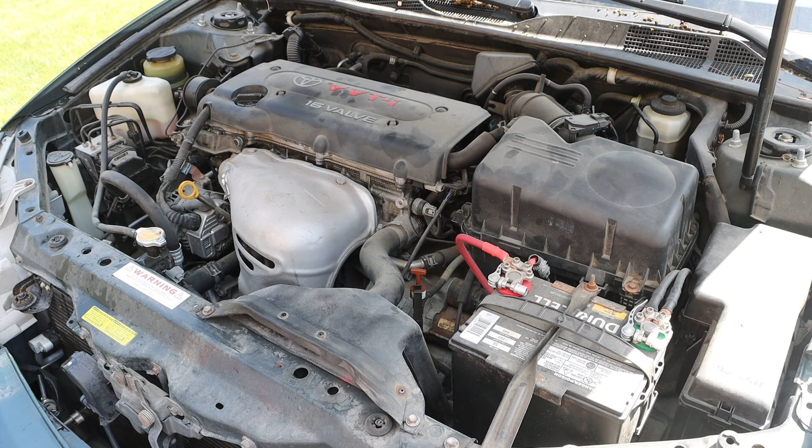In this video, we will be fixing the rattle at startup issue in this 2003 Toyota Camry. At startup, we have a quick rattle, which quits after about 1 second.

This process will be completed in a garage, and the vehicle has been parked so that the passenger side front is accessible. We have jacked it up and supported the vehicle with safety stands. We have set the parking brake. We have wheel chocks underneath the rear tires, and we have also drained the oil.

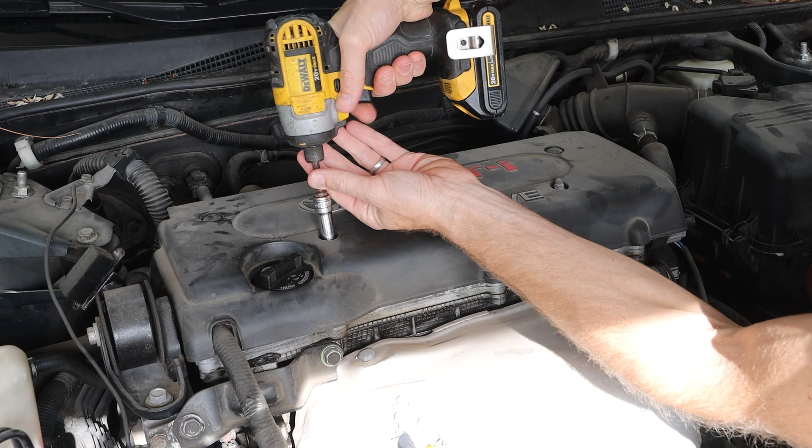And we can begin by disconnecting the negative battery terminal, covering that and setting that out of the way. We can then remove our plastic trim cover piece. This is held on by two 10mm fasteners. And we can pull that up and work it off of the two studs holding it in place.

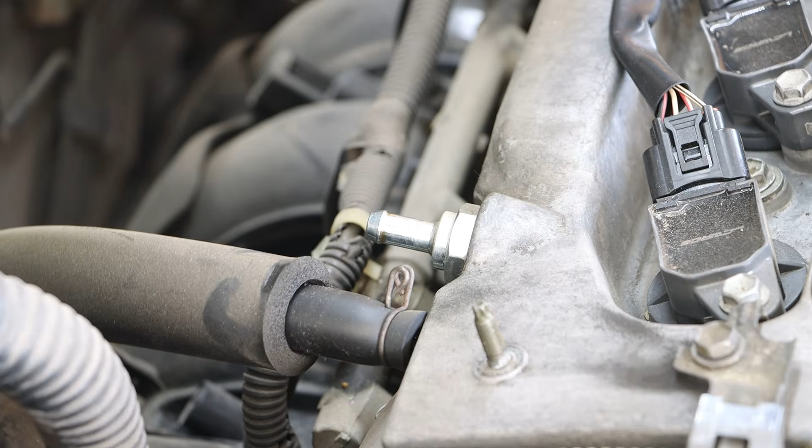We then have two air lines that we need to remove from the valve cover. These are part of the positive crankcase ventilation system, or the PCV system. These are held on by two spring clamps. We can then take a look at our bundle of wires running over the valve cover, and I'm going to be working from the valve cover forwards, removing each connection point. So starting with the top of the valve cover, I do have a 10mm fastener.

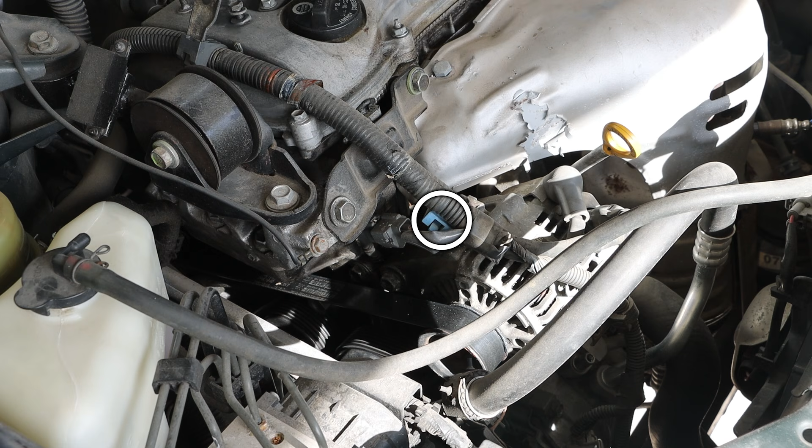Following that down, I have a blue connector and a gray wiring harness just above the alternator. Pressing the tab on the bottom, we can remove that first connector and also that blue retaining connector. And we have 2 points on the alternator, one of which is a 10mm nut. Following it down further again, we have a retaining clip mounted to our AC compressor.

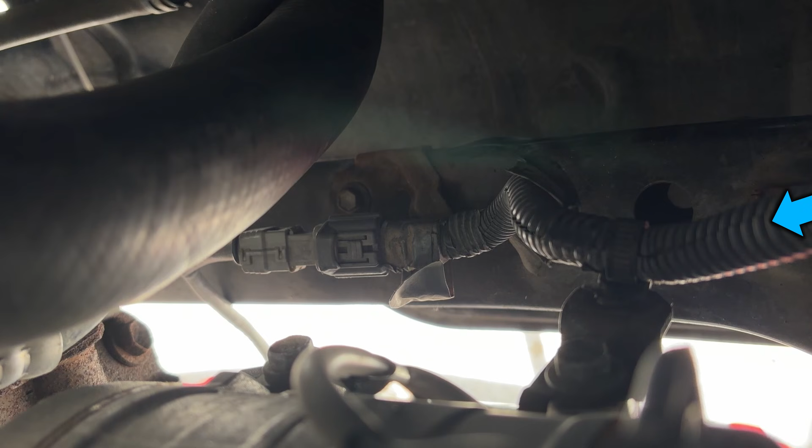We have another wiring harness. If we continue following that wiring loom down into the engine, we can see that we have an additional connection. This is just a small plastic clip. That chunk of wires then gets terminated at the end of the line with one more wiring harness. This one goes to your oxygen sensor located underneath the vehicle. And at that termination point of that entire wiring harness, we do have one 10mm bolt holding that bracket in place. And that should give us the ability to move that entire wiring loom out of the way.

We can then remove our ground wire. There are two 10mm fasteners holding this in. Our 4 ignition coils can come next. These are all held in by a wiring harness and one 10mm bolt. We now have better access to our valve cover.

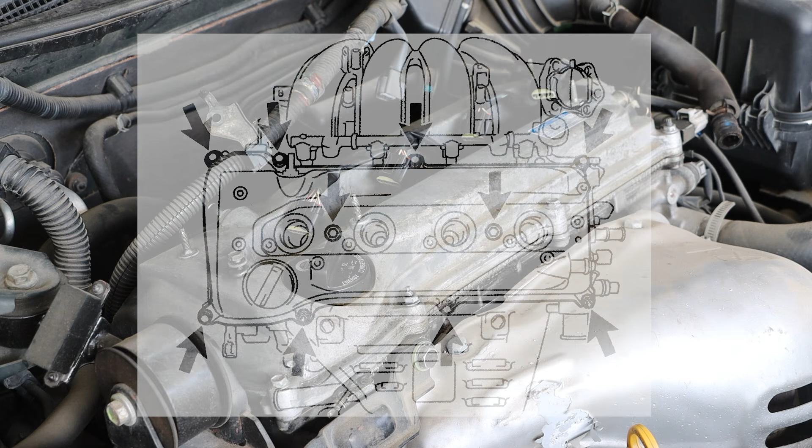Taking a look at the diagram, around the perimeter we have 8 fasteners and 2 in the center. Each of those fasteners are 10mm. Some of them are nuts and some of them are bolts. Plus an 11th one that was holding down our bundle of wires going to our ignition coils.

Our 2 longest bolts went in the middle. The 6 bolts that are the same size go around the perimeter, and also 2 nuts around the perimeter where we have studs coming through, and that one additional short one is what connected to the far end of the valve cover holding that wiring harness down. We should be able to very gently work that valve cover off.

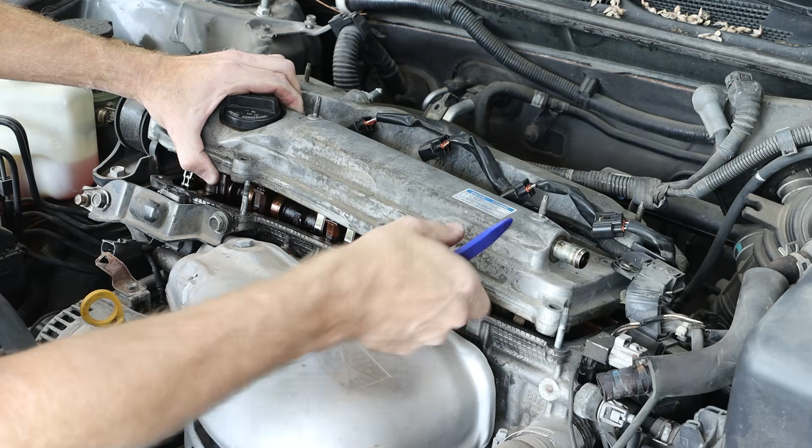And with that valve cover off, we can see our reason for the repair, which is the VVT sprocket, which is what causes the 1 second rattle at the startup. To prep for this next phase, we are going to remove the wheel. And taking a look into the wheel well, we do have a small plastic shroud that we need to remove. Visibly, we can see two 10mm fasteners.

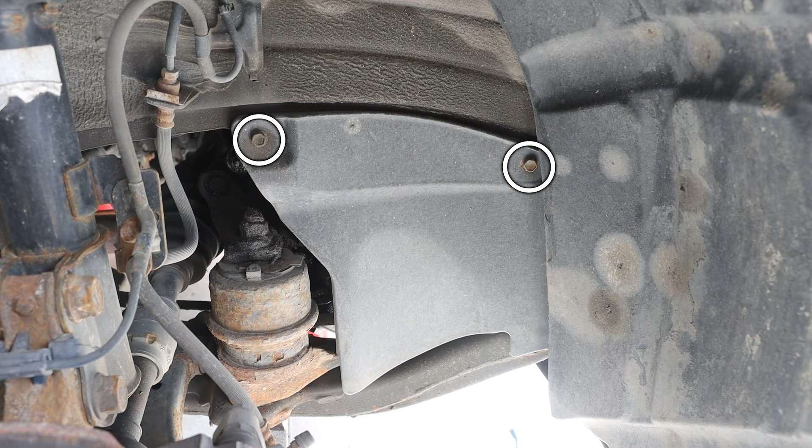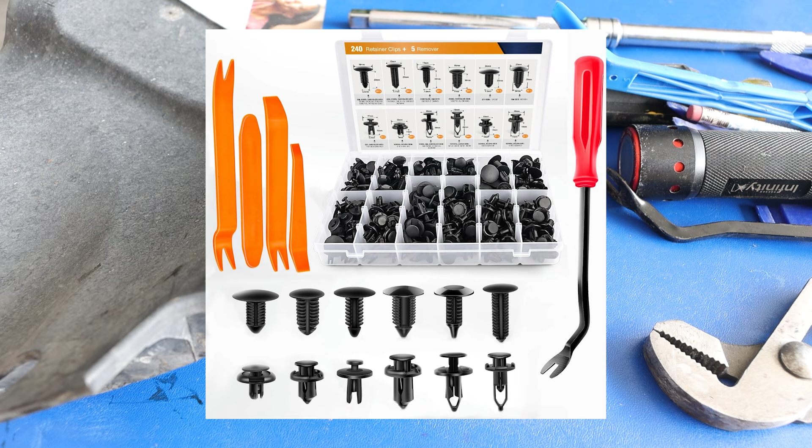And that one hidden fastener did have a button retainer where you pop out the center and pull the clip out. I couldn't see that, so I did end up breaking that little plastic cap, so we'll have to get another one of those. We can then remove the serpentine belt.

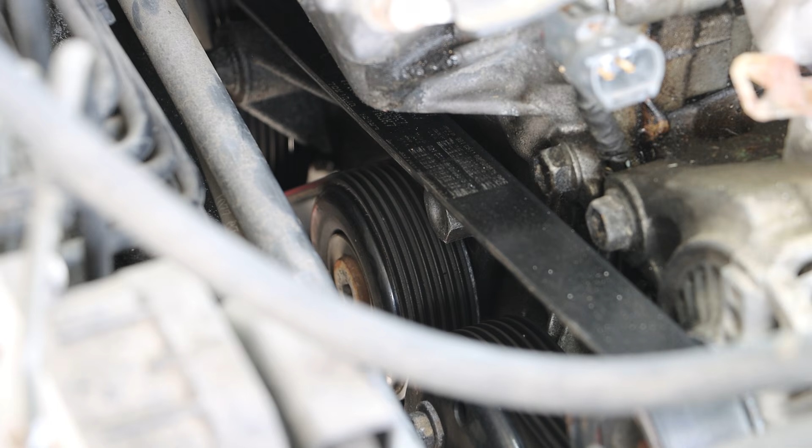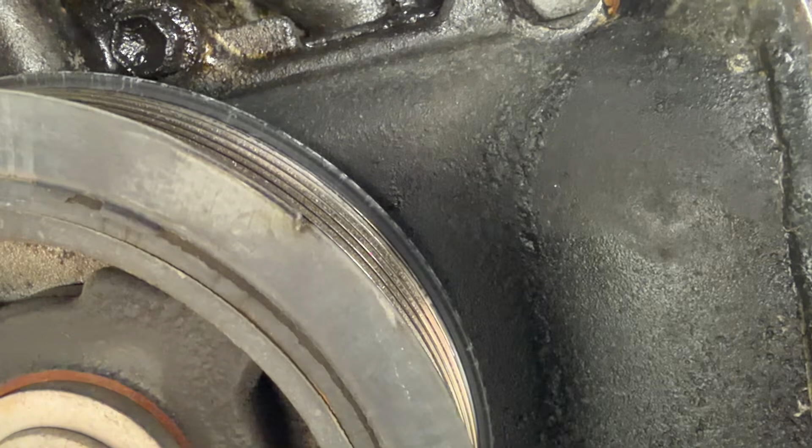If we look through the wheel well and find our crankshaft pulley, we can see that towards the top of it there is a small indicator. This helps us determine top dead center. If we look at the side of that crankshaft pulley, we can see a little notch. This notch needs to line up with our 0 indicator mark. So we are going to rotate that crankshaft pulley clockwise until that small notch lines up with the 0 indicator mark.

Now we do have a couple things to point out. We do have a timing mark on our VVT sprocket, and we also have a timing mark on our camshaft sprocket. If we look behind each of those, we should have a corresponding timing mark. And we can see that VVT sprocket and camshaft sprocket timing marks are lined up.

Now what I do not see is my identified chain link that helps me make sure everything is timed correctly. So I am going to rotate the crankshaft 1 full revolution, check this again. If I don't see those indicator marks, I'm going to go another full rotation and then check it again. And to verify again, I have my timing mark.

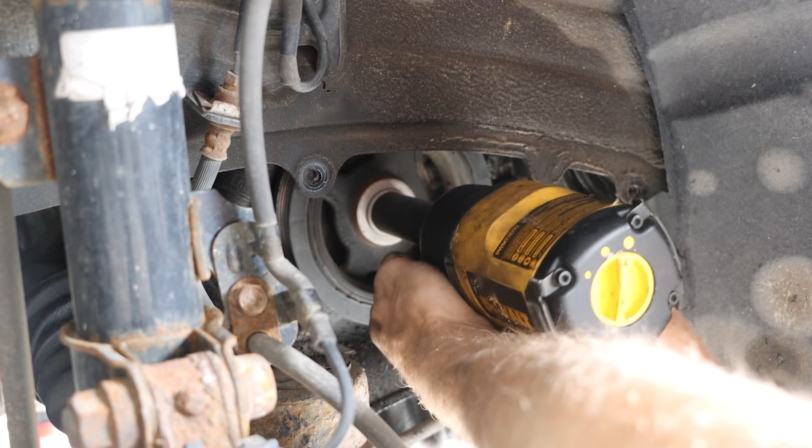That corresponds to my timing mark. I have my other timing mark. That corresponds to my other timing mark. And it is worth noting that our identified chain links are off by about 1 link on both of these. And at this point, we're going to remove that crankshaft pulley. And we can gently wiggle that pulley off.

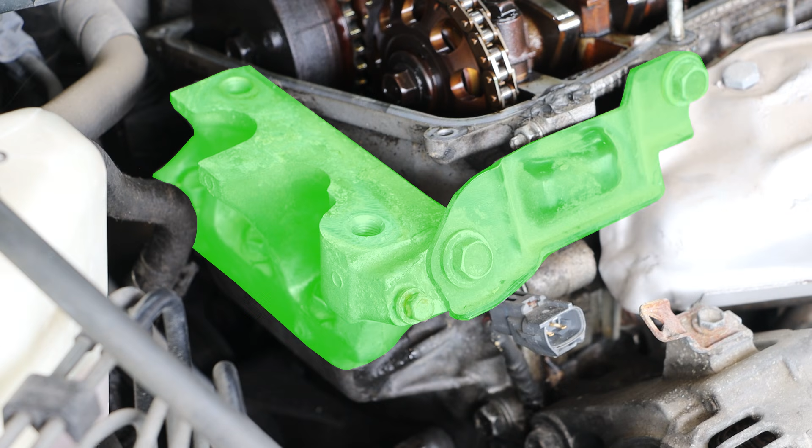Next component to remove is the torque rod located on top of the engine. This will have 3 14mm bolts. And we can remove that bracket that our torque rod unit was mounted to. There are 5 14mm bolts, one of which we do not need to remove.

If we take a look to the right side of the exhaust manifold down into the engine, we can see one 17mm bolt on our motor mount. And to aid in being able to move the engine up and down, I am going to remove the axle nut. This will give me just a little bit more flexibility. And this is a 30mm nut.

We then want to locate our motor mount on the passenger side. The top of that has a 19mm nut.

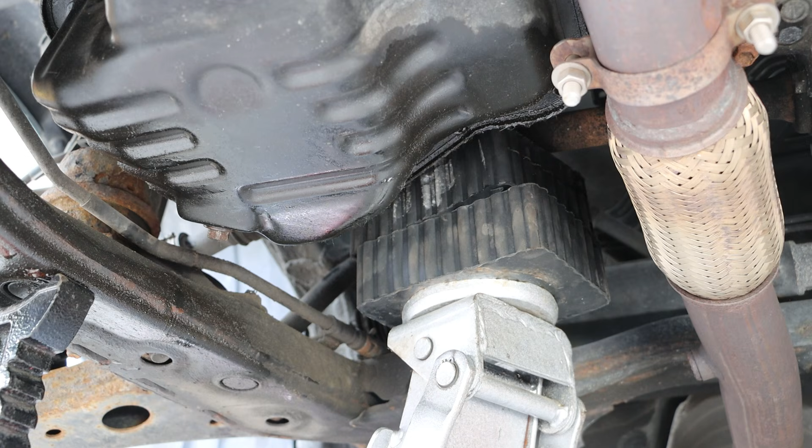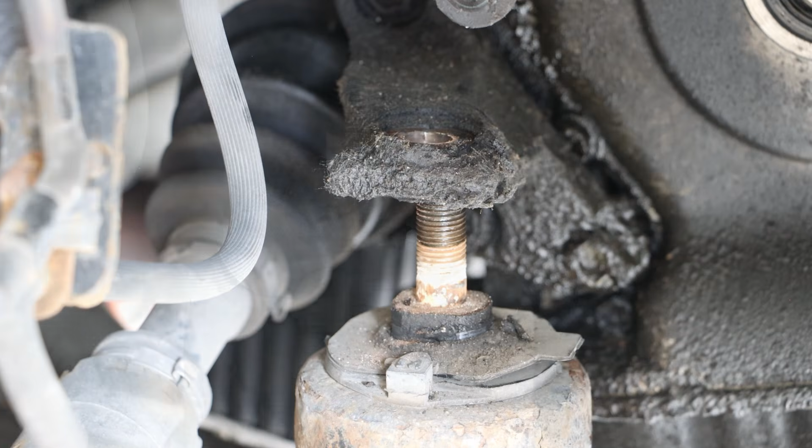To jack up the engine, I have placed a couple rubber blocks on top of my jack, and I have those positioned just behind the oil pan. This way we are not jacking it up directly on the oil pan. And we are actually jacking this up by the bracket that is mounted to the engine that our axle runs through. This does give me plenty of flexibility, and I'm not worried about crushing that oil pan.

And with that engine raised slightly, I'm going to switch my focus back to the top of the engine, and I'm going to locate my water pump pulley. And with 2 wrenches opposing themselves, I can loosen up my first bolt. So we got 3 of those loose, and we can loosen a couple of those up part way to get a screwdriver in there and use that screwdriver as leverage for the last one.

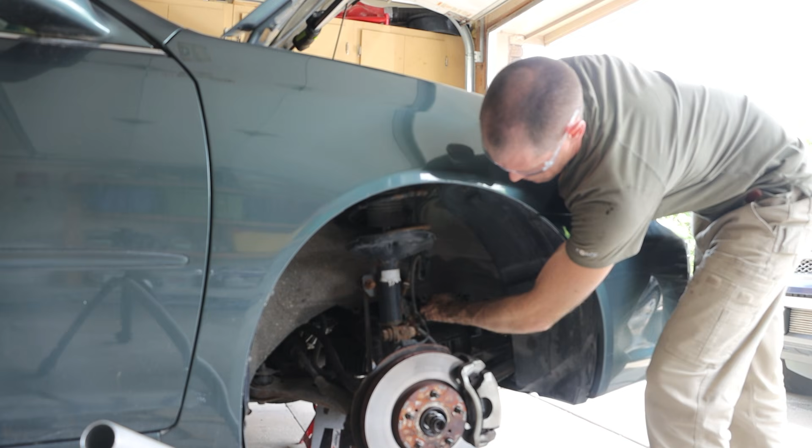And then we can shift focus to the tensioner itself. We have 1 bolt that is pretty clearly visible just to the left of that tensioner pulley, and that one is a 14mm bolt. And that tensioner is held on by 1 additional fastener. And then we can remove the bracket for our motor mount.

And we can then shift focus to the power steering pump. And behind that power steering pump, we can see 2 14mm bolts. We can rotate the pulley till one of our holes lines up with our bolt and work on a socket. And I am going to lower the engine down just slightly to get that last bolt out. And we should be able to work that power steering pump off. And this might require wiggling it back and forth to work that loose.

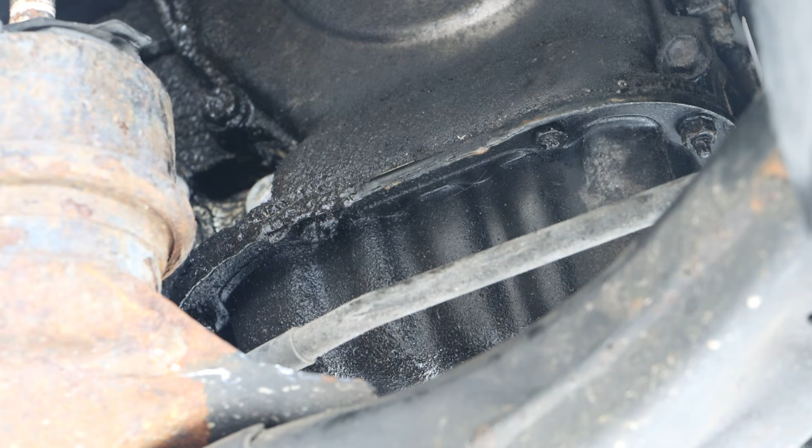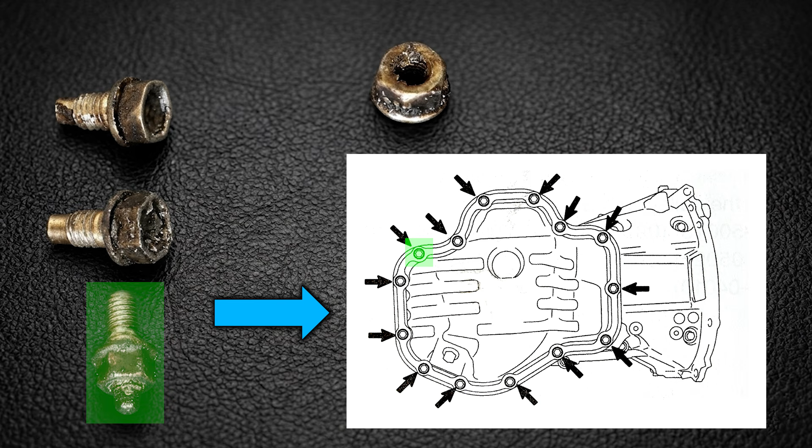Taking a look at our wheel well, we do want to locate the oil pan next. Specifically on the oil pan, we are taking a look at the front edge of it. And on that front edge, we have a series of 4 fasteners that we need to remove. These are 10mm fasteners. And if we take a look at those 4 fasteners, this is as if you were looking from the wheel well. We have a nut that is 10mm, 2 10mm bolts, and we have an additional 10mm bolt that has an inverted Torx head on the end of it.

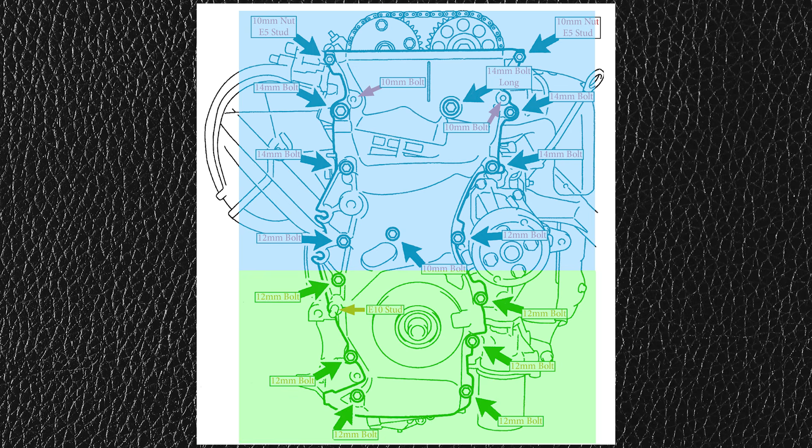And at this point, we are ready to remove the timing chain cover. We have a series of 14 bolts and 2 nuts around the outside of this timing chain cover. We should be able to access about 6 of them from underneath, and the rest we should be able to get from up above. And so we will just slowly work through, making sure to identify the location of each bolt, just in case the bolts are different sizes or lengths, etc.

And on the top right and left, we do have these inverted Torx. These are E5s. And to help things go just a little bit smoother, I did create a worksheet and taped it to a cardboard box, which allowed me to place each bolt in the correct location as I removed it.

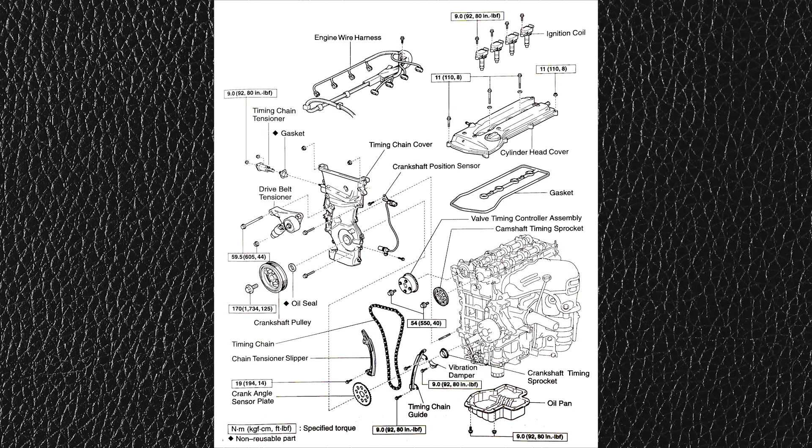On the back side of the timing chain cover, we have a timing chain tensioner, and on the front side, down towards the bottom of our timing chain cover, we have a crankshaft position sensor. We will take a look at this one first. And if we take a look at that, we can see one 10mm fastener holding that in place.

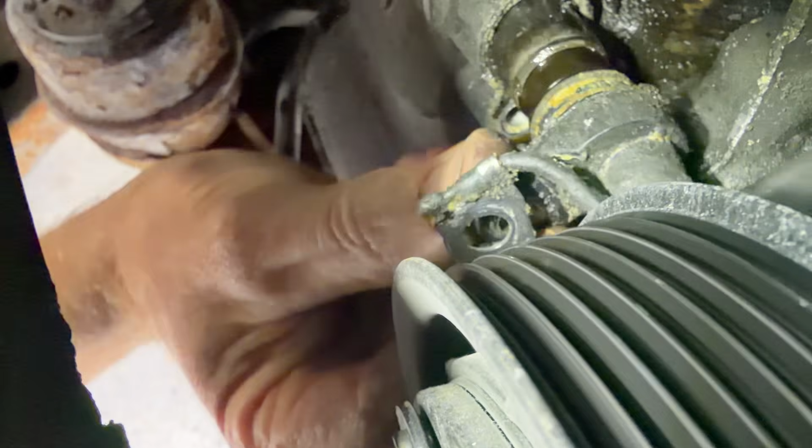At this point, we should be ready to remove our timing chain cover. I am going to give it a few light taps with a soft face hammer to hopefully loosen it up a little bit. And then I am going to gently pry from the bottom left corner to see if this will come off. Now it is worth noting that if you did not remove the E10 stud that goes through the oil pan, the pry method will not work because you're just pushing against that stud.

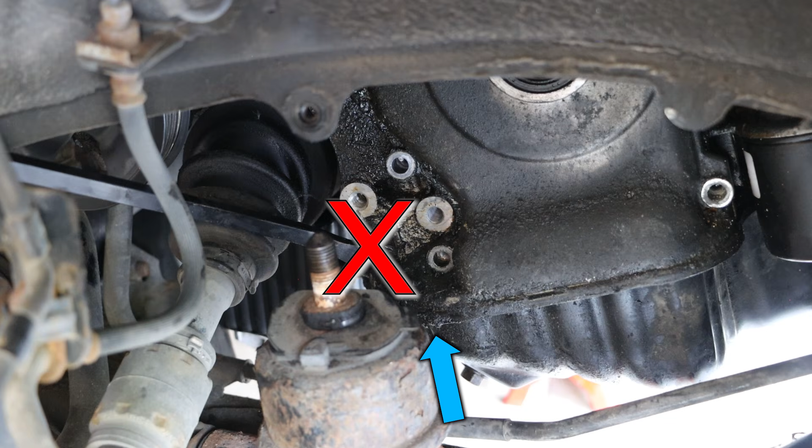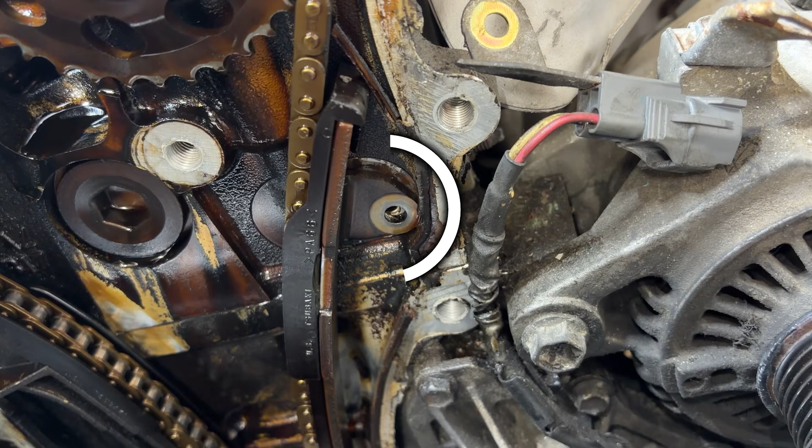Taking a look behind the chain cover, we can see our chain tensioner slipper on the left, and we can see our timing chain guide on the right. And on that slipper, we have one 12mm bolt at the bottom. And on that timing chain guide, we have one 10mm bolt at the bottom. And we are supposed to have one at the top also. This one was found loose inside of here. And we can remove those bolts and then work those components out of the engine and off of that timing chain.

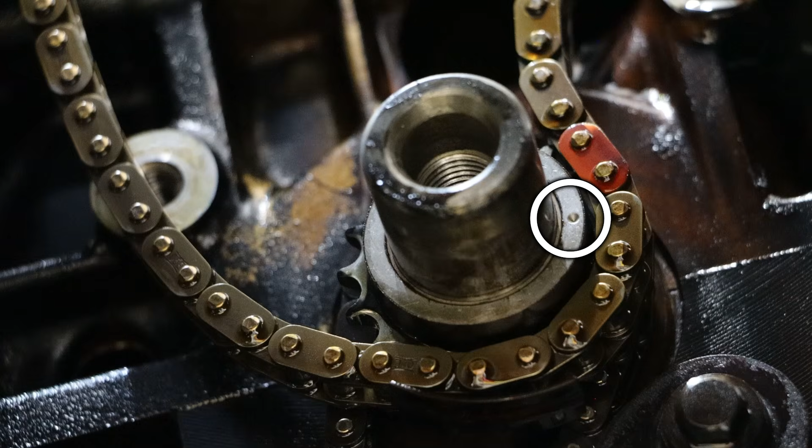Taking a look back towards the bottom, we have our crank angle sensor plate that we can work off. This is keyed and labeled with an F. And then we can see that timing mark on our crankshaft timing sprocket. Again, our indicated link is one link off, which corresponds to above with it being one link off. And we can go ahead and remove that timing chain. And we also have that crankshaft timing sprocket we can remove. And this one is keyed also.

We will then be removing our camshaft timing sprocket. We are first going to place an adjustable wrench on the camshaft. This will help hold it in place while we are loosening our bolt. And this then is a 14mm. And this is also keyed. That key is in line with the timing mark.

And that same procedure will be followed on the other side with our VVT sprocket or valve timing controller assembly. And that also has a key to help us set up our timing.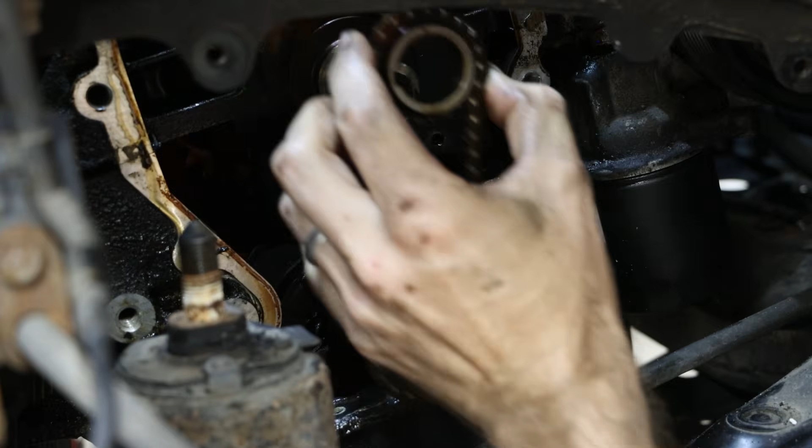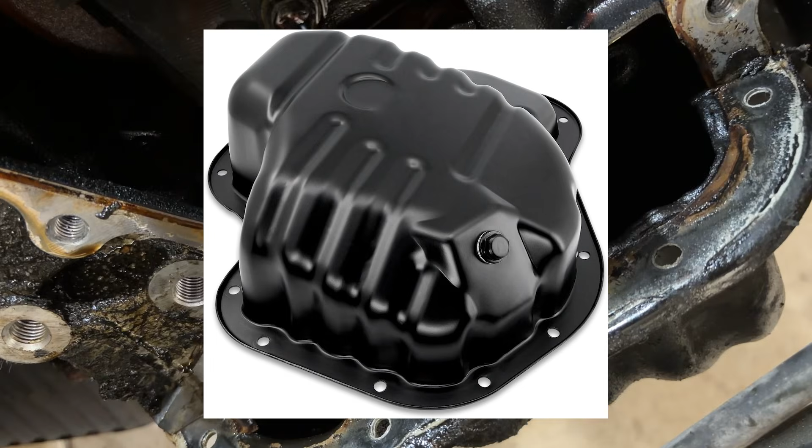At this point, we should have everything removed and we should be able to proceed with reassembly. One thing I did notice is that the water pump appears to have a piece of belt stuck in it. And given that we have plenty of access, we're going to go ahead and just replace the water pump as well. I also noticed that I had some debris fall into the bottom of the oil pan. So we're going to go ahead and remove the oil pan and replace this also. This will also give us an opportunity to inspect the pan and the components inside of the pan.

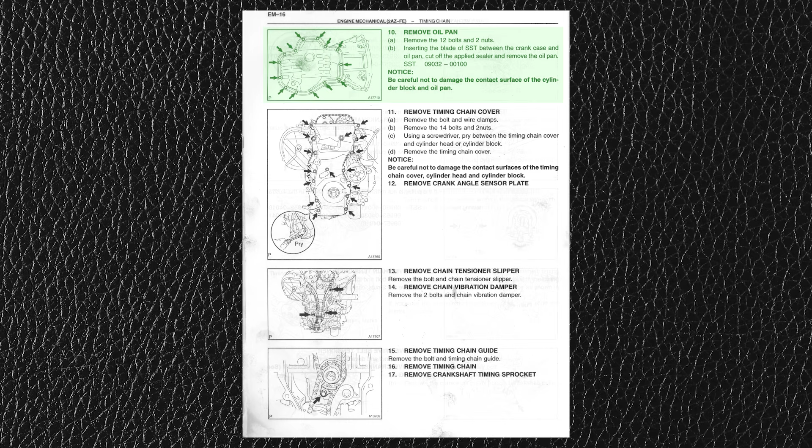Now in total, that oil pan does have a series of 14 fasteners, and in the Toyota instructions, they do want you to remove the entire pan for this procedure. Just something to keep in mind. And if we take a look underneath the vehicle at the oil pan, we do see a series of fasteners. All of these fasteners are easily accessible, which will make this repair just a little bit easier.

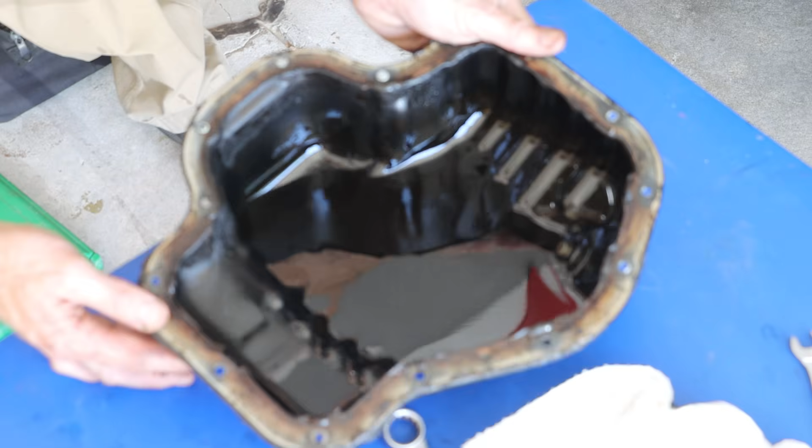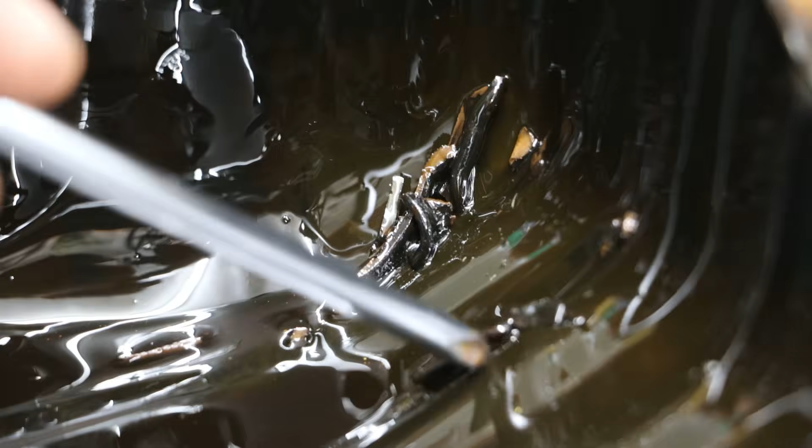And even though I did drain all of the oil out of this before starting this repair, you can see how much oil has accumulated from dripping off of the engine, as well as oil that just does not get evacuated from the system. So we're basically looking at about a half a quart of oil left in the system. And as I was doing this, I did notice some debris in the bottom of the pan. It is possible this is just old gasket material that has got crusty and broke off when I pulled the pan. And we do have some metallic specks in the bottom as well.

To remove the water pump, we first need to gain access to it as it is sitting behind the alternator. We have one 14 millimeter fastener that is pretty easily accessible.

And then we have a 12 millimeter fastener that is a little bit harder to get to underneath. And we should be able to pivot that out.

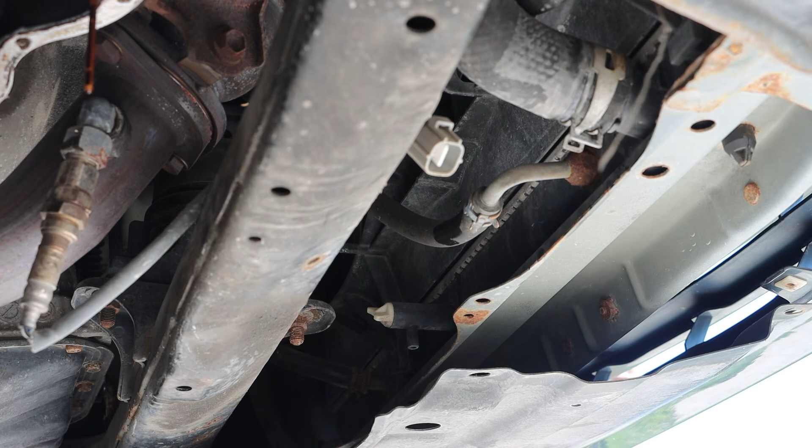Our system currently has coolant in it. We need to drain that down far enough that we're not going to make a mess when we pull off the water pump. This begins with removing our shroud under the front of the car. Taking a look up underneath, we can see our petcock. This will allow us to drain down our cooling system.

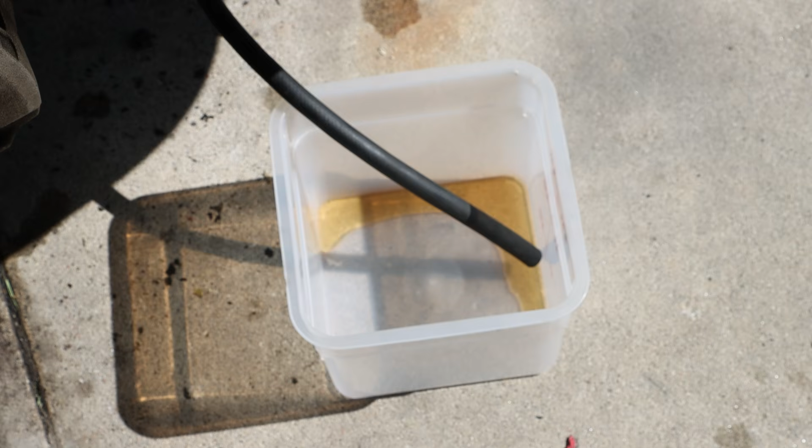For a more controlled evacuation, we can hook up a length of tubing and open that valve into our collection bucket. And since this is a sealed system, removing the radiator cap will introduce air that will allow it to flow easier.

On the water pump, we have a series of 6 fasteners around the perimeter of the pump. These are 10 millimeter fasteners. And we can remove that wiring harness as well. And we'll see if we can loosen that up with a soft face hammer. And you will want to have a drip pan underneath to catch any residual fluid.

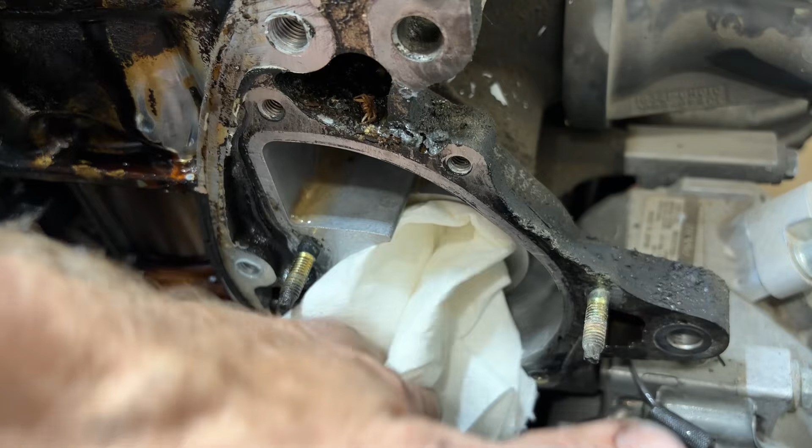And we can stick a rag in there while we prep this for our new one. And we can then use a plastic scraper to clean off the old gasket material and any buildup. And while I'm at it, I will just continue right around to the mating surface for my timing chain cover. And with the bulk of the material scraped off, we can come back with some acetone and clean this up really nice.

And while we are replacing parts, we might as well replace the thermostat. So we want to locate the thermostat housing, which is right next to where our water pump was. And we do have two 10mm fasteners, one on top and one on bottom. And to gain better access to the one on the bottom, I am going to remove my radiator hose. And using some pliers, we can work that thermostat out if it is stuck.

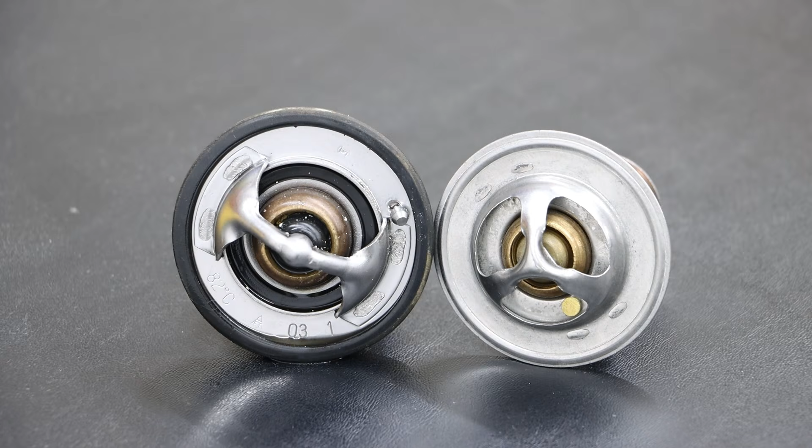Taking a look at our new thermostat, it is slightly different. And our new one does not have a gasket, so we will transfer that gasket over and check to make sure that it is in good condition. And the jiggle valve needs to be positioned straight up in the engine, just something to be aware of. And we can then reinstall our housing. And both of these bolts will be torqued to 80 inch-pounds. And we can reconnect that lower radiator hose.

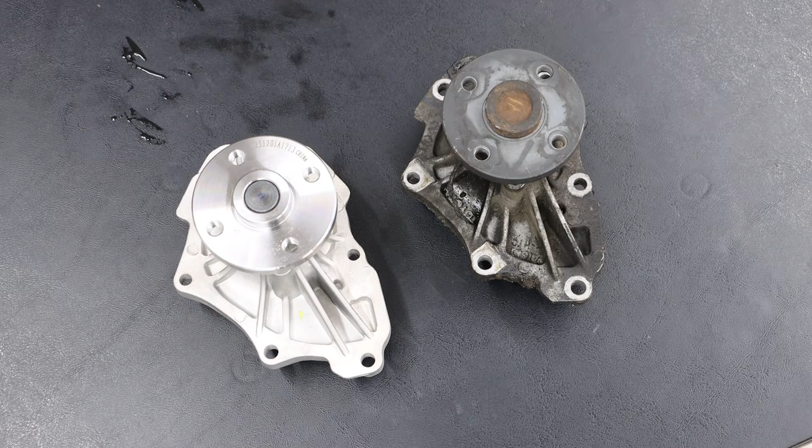We can then compare our new water pump with our old water pump just to verify that everything looks the same. And to seal this to the engine, we are using Permatex water pump and thermostat housing gasket maker. We will be applying a continuous bead of silicone to the water pump surface, and we are going to surround each of the bolt hole locations.

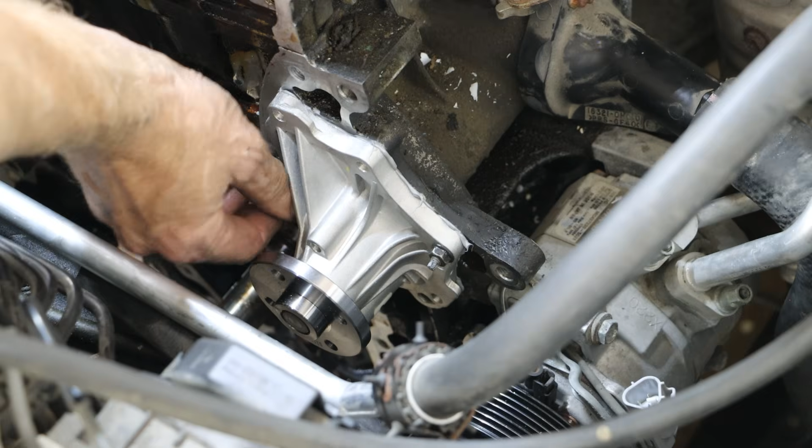We will assemble the parts immediately while the silicone is still wet, and we're going to finger tighten each of the bolts until the silicone begins to squeeze out slightly. We're going to let that dry for 1 hour, and then we're going to tighten it to our torque specifications. Now, if you remember, I did have a wiring harness bracket on 2 of these bolts, so we will go get that set up.

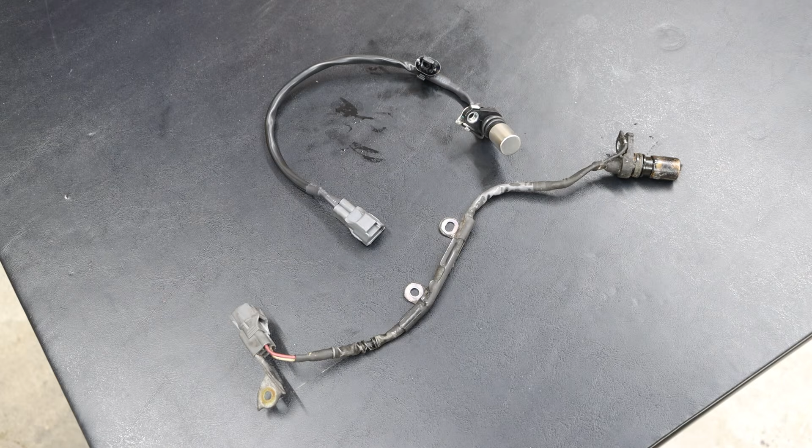And for that crankshaft position sensor, we can compare our old part with our new part. The only difference is the metal bracket that goes on the water pump, and we have an additional small bracket that goes on the wiring harness end. So we'll go ahead and put that in place on our vehicle. And we will wait that 1 hour before torquing these down.

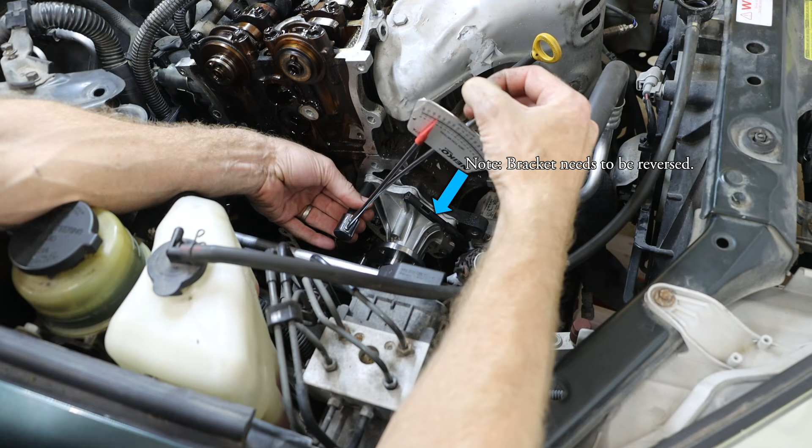And at this point, it has been sitting for 1 hour. We're going to jump around as we tighten these, and we are torquing them down to 80 inch-pounds. And I do have a very small bit that squeezed out where my timing chain cover is going to go. Once this sets up fully, I will cut that off just so it doesn't get in the way.

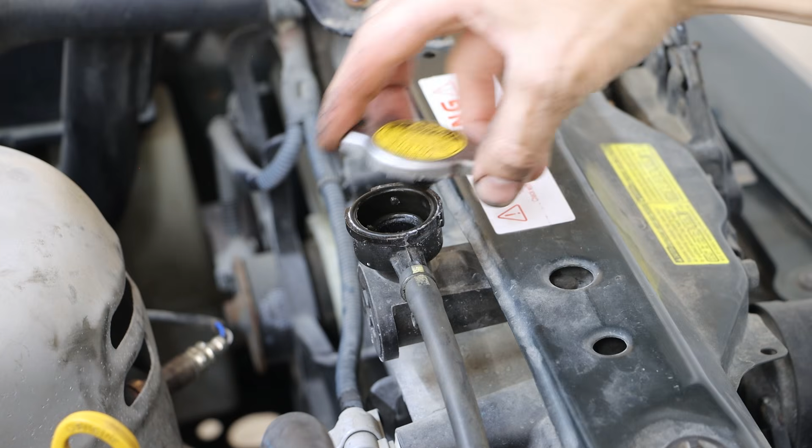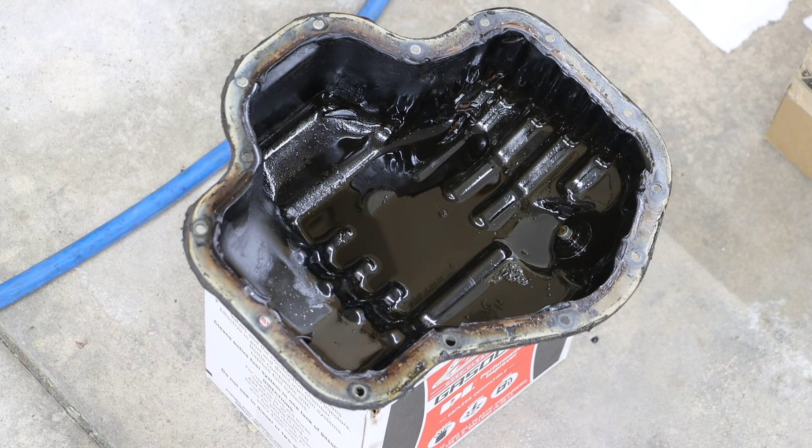And we will do a little bit of wrap up on the cooling end of it. This includes reinstalling the radiator cap, removing the hose, and tightening the petcock. And I will leave off my lower shrouds and the alternator, which should give me just a little bit more access. And we will also leave the oil pan till the end, as all of those bolts are accessible, and I don't want anything accidentally falling in there.

And back to our crankshaft position sensor, we will move that other small metal bracket. And at this point, we will be setting up our oil pump drive chain with our oil pump drive sprocket, as well as our oil pump drive shaft sprocket.

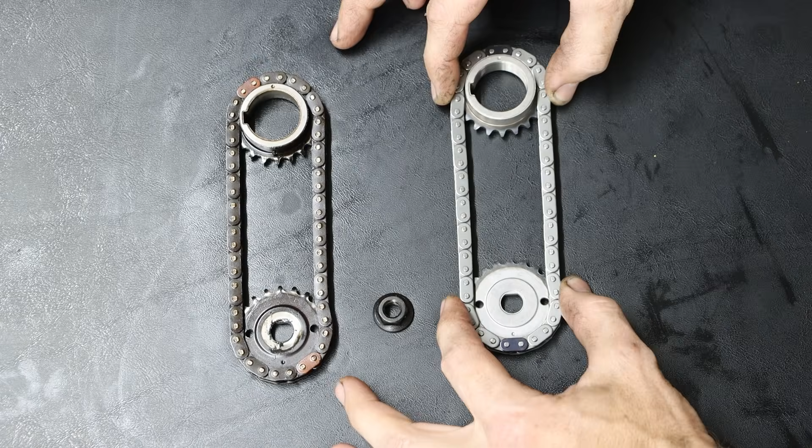A couple things worth noting. Our oil pump drive shaft sprocket does have a flat portion on it. And we can also see that our timing mark is aligned with our identified link. And on the oil pump drive sprocket, we have a keyway. We can also see that timing mark, and we have aligned that with our identified link.

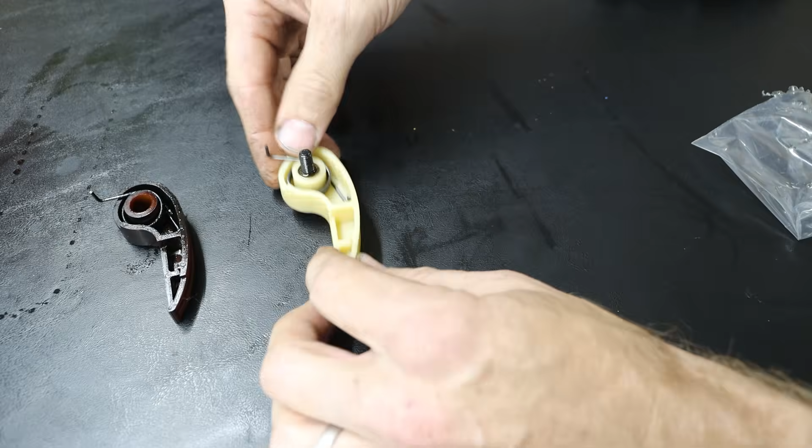And we can gently work that unit into place, making sure that it is fully seated. And I'm going to loosely add that 14mm nut. After that, I have my chain tensioner. And we do have that small spring that we want to get positioned correctly. And we can then install that on the vehicle. And this is a 10mm fastener. That chain tensioner does get torqued to 9 foot-pounds.

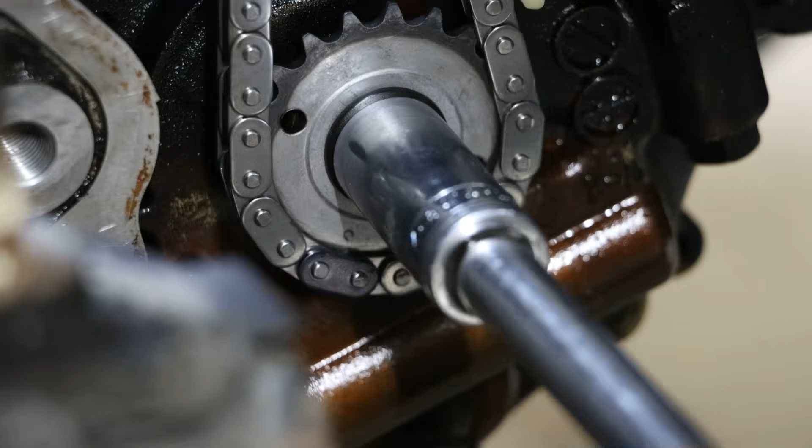We can then reinstall our punch, and this will be torqued to 22 foot-pounds. And then we will rotate this back 90 degrees to its original position. We can then shift focus to our VVT sprocket. And prior to installation, I am going to put just a little bit of oil on this. And when installing this, we do want our timing mark to line up with our timing mark on the engine.

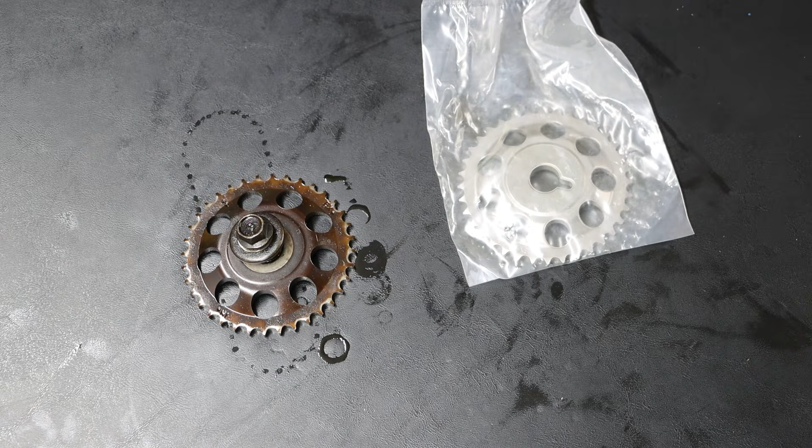And we can install that bolt. This is a 14mm bolt. It is tightened to 40 foot-pounds, and we do want to hang on to the adjustable wrench so we are not rotating components within the engine. After that, we have our camshaft timing sprocket. And this is also tightened to 40 foot-pounds, and you will want to move that adjustable wrench.

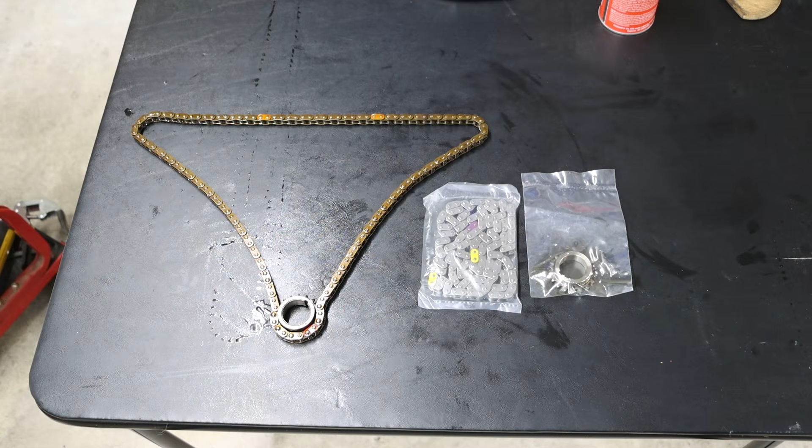Our timing chain and crankshaft timing sprocket come next. And we do have that one timing mark that needs to align with our identified chain link. And before installing this, you do want to verify the timing marks line up on the VVT sprocket as well as the camshaft sprocket. It is also worth noting there is a little bit of spring back, so these timing marks will be close, but they will be just slightly off because of that spring back tension.

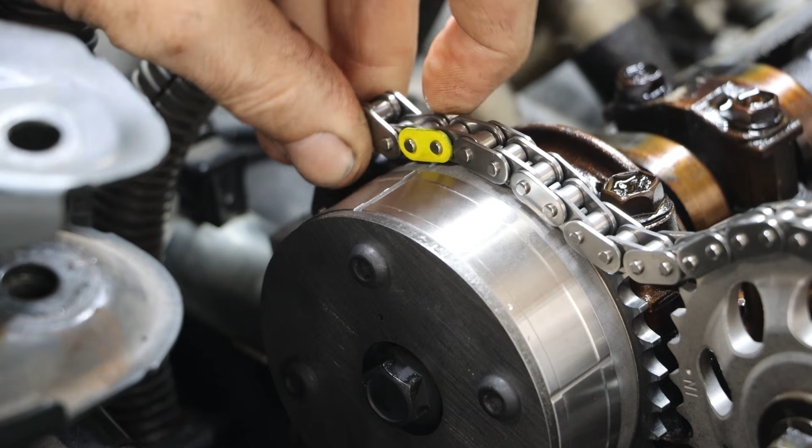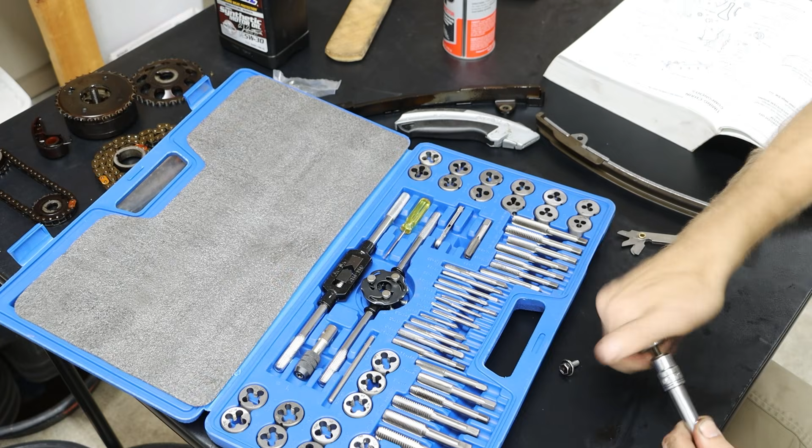And we then have our chain guide. And as I inspect the top bolt, I can see that the threads are damaged. This was the bolt that was just sitting inside of there when I disassembled it. This has a thread pitch of 1.0. This would be a metric 6 by 1.0. And we'll check that out and see if that one works. And that one does thread in really nice now. Both of these bolts, one at the top and one at the bottom, get tightened to 80 inch-pounds.

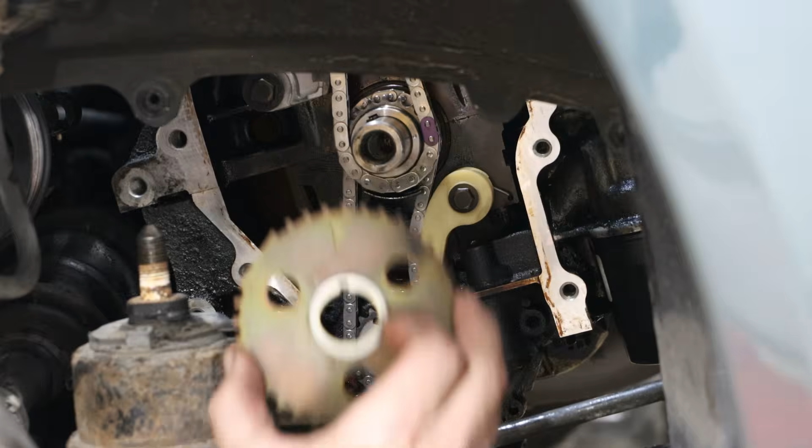We then have our slipper. This will be torqued to 14 foot-pounds once it is seated and installed. And to make sure that this fits properly, I am going to ever so slightly rotate the camshaft back against that spring pressure as I position this in place. We can then install our crank angle sensor plate with the F marked forward.

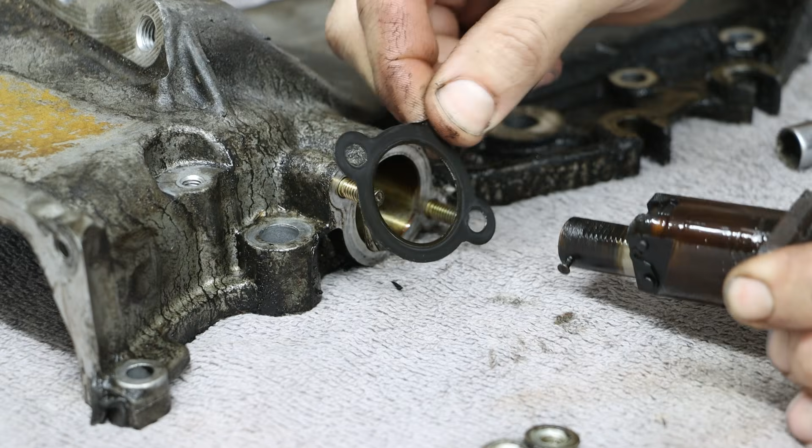At this point, we are going to be prepping our timing cover for reinstallation. And we will begin by removing the chain tensioner. This has two 10mm bolts. And we do have a gasket on that. And we will come back with some acetone and clean up those mating surfaces.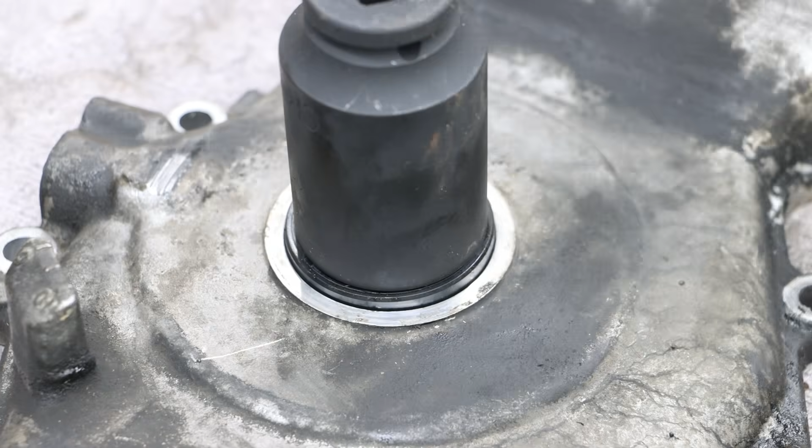And using a hammer and standard head screwdriver, we can tap out the old seal. And we can tap our new one in place. And we do want that flush with the outside. And we'll apply just a little bit of oil to that new seal. And I do like to test fit this prior to installation just to see what might be hitting. And essentially I am just practicing to make sure that it goes smoothly and I don't bump that gasket material against something.

Now I was getting caught up on this wiring harness. There is an additional 10mm bolt on the back side of this that is very difficult to see. This does allow me to move that wiring harness out of the way a little bit more. And we will clean both surfaces one more time with acetone. We will be using Permatex Ultra Black gasket maker.

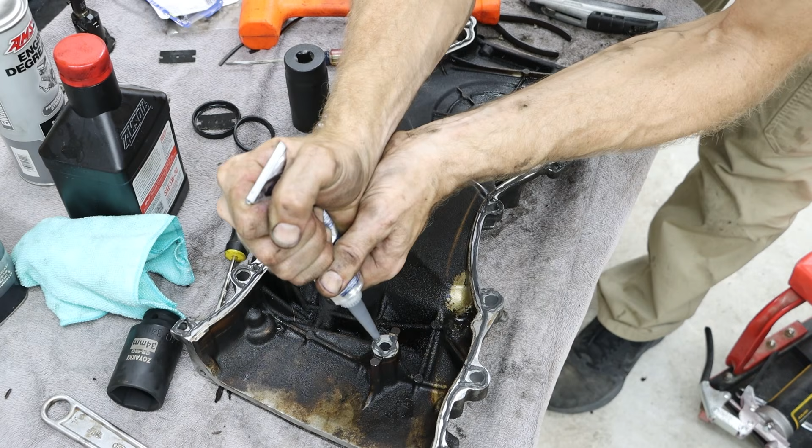And similar to the water pump, we will apply a bead of silicone around the entire surface and each bolt hole. And don't forget the locations in the middle. And on our engine block, any location where we have a seam, we want an additional small glob of sealant. And there will be 4 different locations for that. We can then very gently work that in place and finger tighten each bolt until it squeezes out just a little bit.

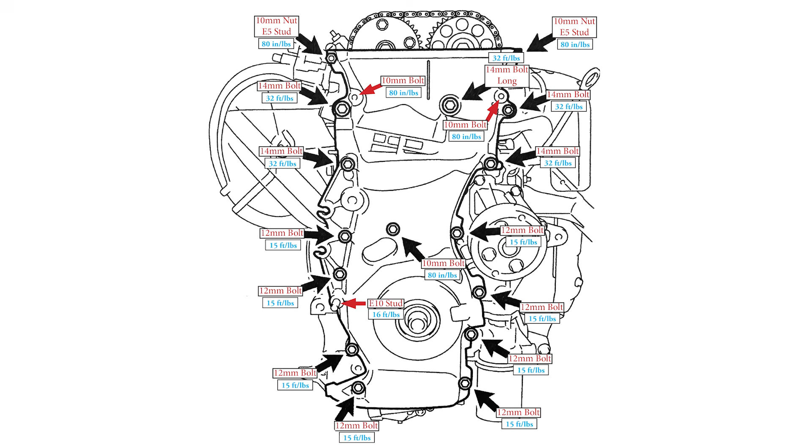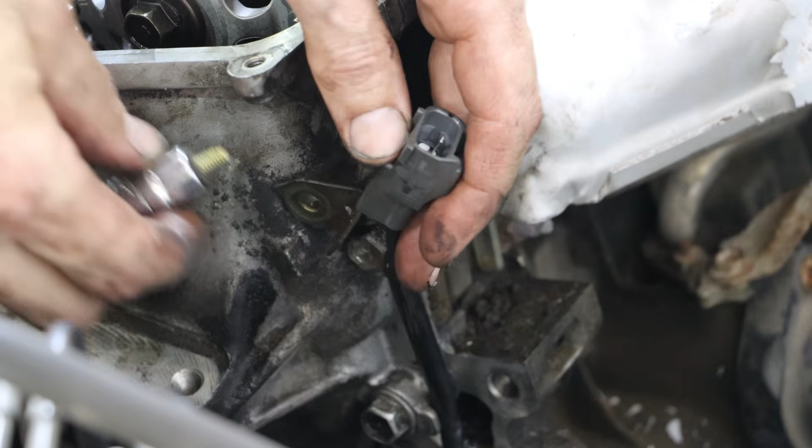We will then wait an hour and then tighten it down to our torque specifications. And I went ahead and updated the worksheet to include the torque specs as well. I figured that would be helpful. The crankshaft position sensor can then be installed next, and that is held on with one 10mm bolt. And I do like to put a little bit of oil on the O-ring prior to putting that in. And we can put that wire back in that harness that is mounted onto the water pump. And one additional 10mm bolt.

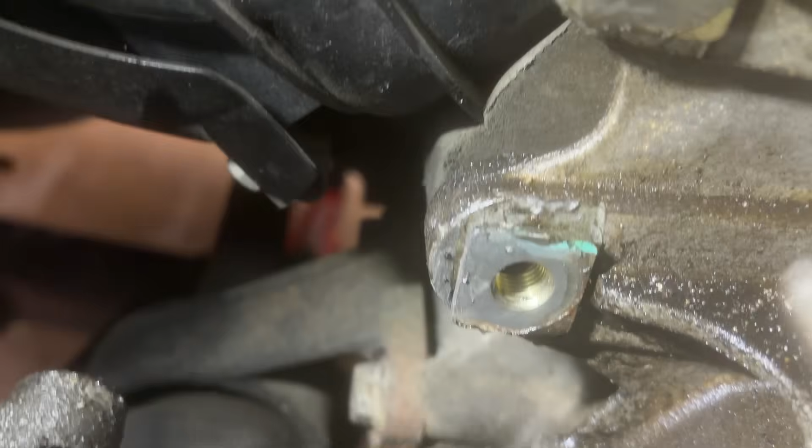Our next goal is to work the power steering pump back on. This was probably the most difficult part of the job. It did take me about 2 hours to get this positioned correctly. The bolts are very long. You have to raise and lower the engine, and the bracket has to have the bolts threaded into it on the back side. We can see the 2 threaded locations. There is a bracket on the front side, and the power steering pump has to fit in there very tightly.

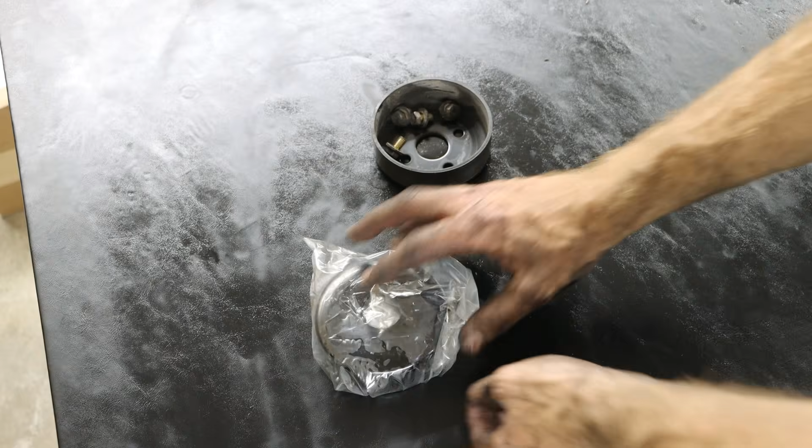After that, we have our motor mount bracket. Next, we have our belt tensioner. We will be switching this out with a new one because the originals do tend to break over time. And then we have our water pump pulley. And since we switched out the water pump, we went ahead and switched out the pulley for a new one also.

We can then lower the engine and install our nut for the motor mount on the passenger side. And our motor mount on the front, we have a 17mm bolt. And we will tighten up that axle nut on the passenger side. And at this point, I think we are ready to reinstall the oil pan.

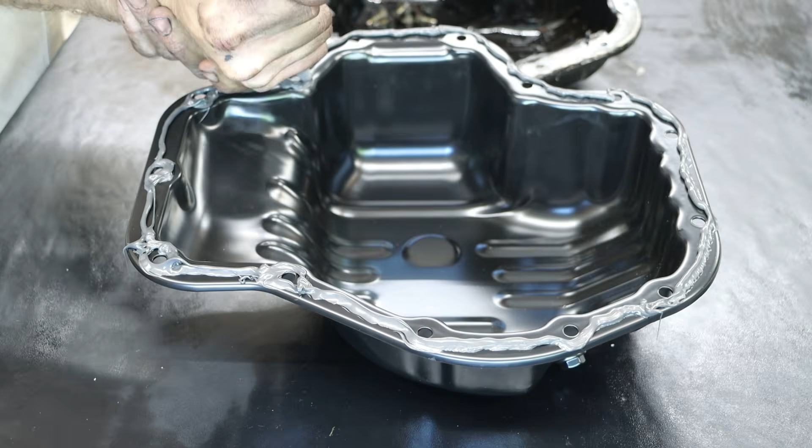We are switching this oil pan out for a new one. And similar to the timing chain cover, we will be using Permatex Ultra Black gasket maker around the perimeter, as well as each bolt hole. And we will want to scrape any gasket material off prior to installing our new oil pan. And a little acetone to clean that up.

And although I did get this to work, I would recommend installing the pan prior to lowering the engine and reattaching the motor mount bolts. Like I said, I did get this to work, but it was quite the puzzle to fit it in there. And we then want to finger tighten each bolt and let that sit for 1 hour before coming back and torquing this down. And each of these are 78 inch-pounds.

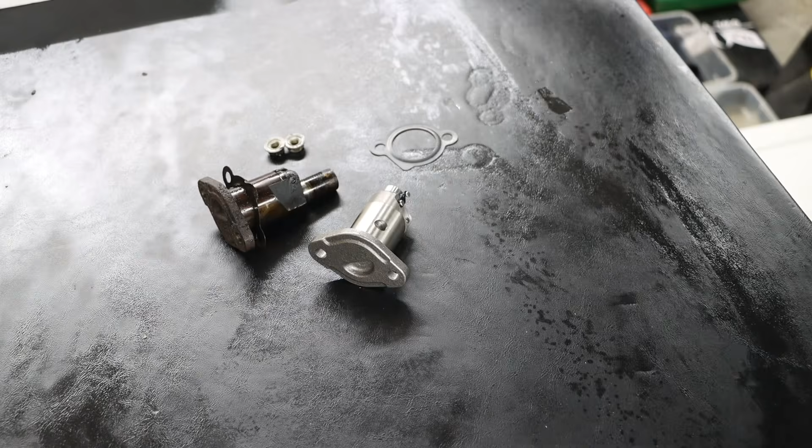We can then start working with our chain tensioner. We do want the small ear to be facing back and up. And installing this was the second most difficult part of the job. There basically is not enough room with this wiring harness where that tensioner hits on it. I'm sure there is a bolt that would allow you to move that wiring harness further.

And we can install our crankshaft pulley next. This gets torqued to 125 foot-pounds. And after that is torqued, we are going to slightly rotate this counterclockwise and then slightly rotate it clockwise. This will set the chain tensioner. And we are going to end back on our 0 mark. And we have a couple more bolts for our wiring harness that is covering up that chain tensioner.

We can get the alternator put in next. And we can then install the serpentine belt, followed by our torque rod unit. And I like to coat the chain with a little bit of oil before we install that valve cover. And we'll switch out that valve cover gasket, making sure we clean the mating surfaces before applying that new gasket. And a little extra sealant will be added to the seam location on the engine. This will be done in 2 locations.

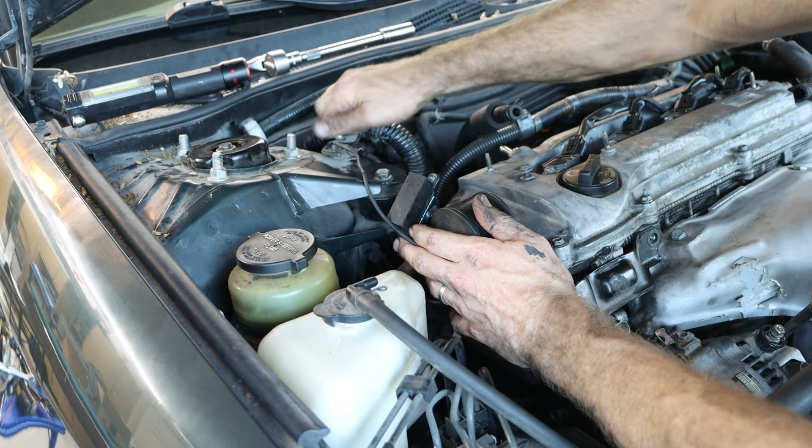And the valve cover comes next with each of the fasteners. Then we can install our ignition coils, followed by that ground wire. And then we have our long wiring loom that runs over the top of the valve cover, beginning with a 10mm fastener on top of the valve cover.

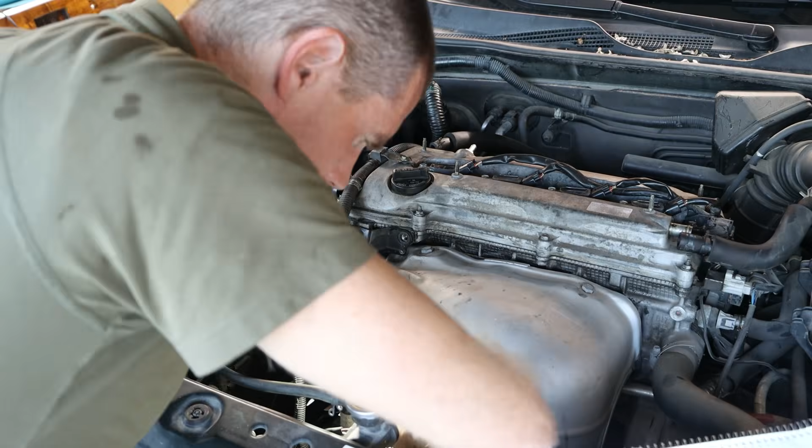We have one connector for our crank position sensor, and then we have a blue retaining clip, 2 points of connection for our alternator. Then we have a plastic clip a little bit further down, followed by our wiring harness for the AC compressor. Another plastic clip further down, and then we have our O2 sensor connection with that 10mm bolt and bracket. And 2 PCV system hoses, followed by our plastic trim cover piece.

Other jobs I need to do is reinstall the splash guard in the wheel well and reinstall the tire. Now I'm not going to fill this up with oil or coolant just yet because I do need to wait 24 hours for that gasket material to fully cure. It has now been 24 hours and we are ready to top off our cooling system. And we will add just over 4 quarts of oil. And I did change the filter also.

You will want to check the oil and top off as necessary. Also, purging the air out of the cooling system is recommended. Additionally, I will give the engine a few heat cycles prior to taking this for a test drive.